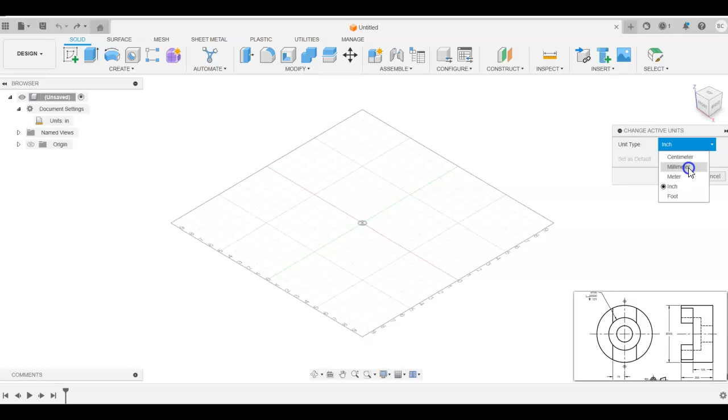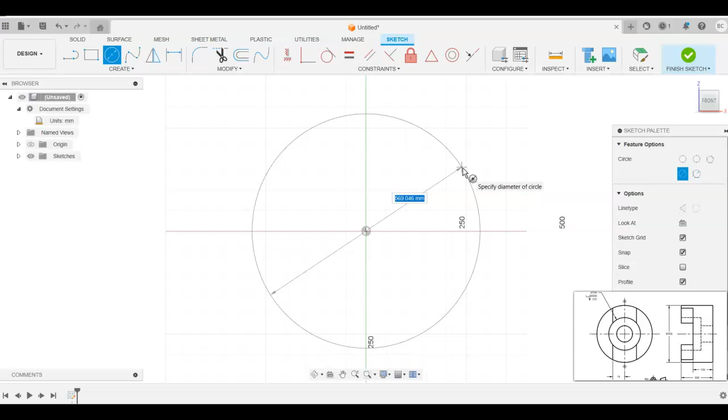So first thing, I'm going to come up here and double check to make sure that our units are in millimeters, since this drawing is in millimeters. And then I'm going to start by creating that sketch. We're going to create the sketch on the front view, and I'm going to basically draw the circle here. The outside diameter of this part is 500 millimeters. So we'll place that. That's all I need.

I'm going to click Finish Sketch. Go back to my home view. So we're going to extrude this back, and the depth here is 200 millimeters. So I'll extrude this back to the 200 millimeters. Hit enter. So I've got that form.

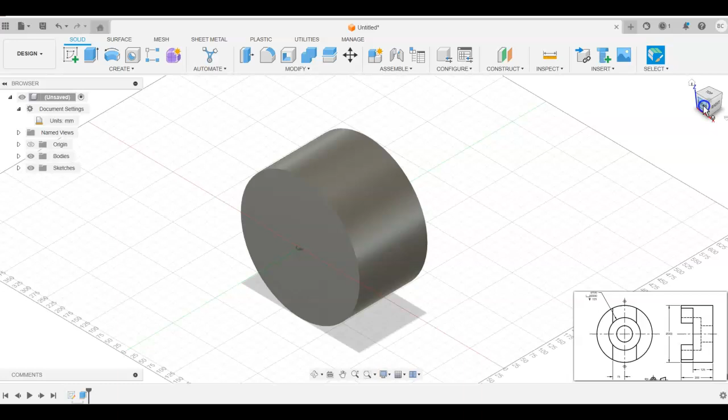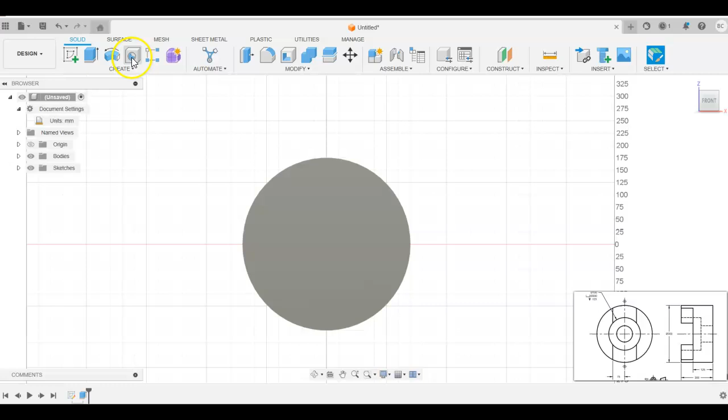Now, as I come back around here, we're going to come back in and we're now going to use the hole feature. Oftentimes we're given certain dimensions or we're given an existing print. We have to draw and create it from an existing print. So we're going to create this hole.

Now, it wants us to select the face first. So I'm going to select the face. Then it wants the placement at a point. Well, we're going to use the center point here. It makes sense that we draw this as a center. Now, with it being that point placement, I don't have to select any X, Y, or Z reference planes, but we could use those there as well.

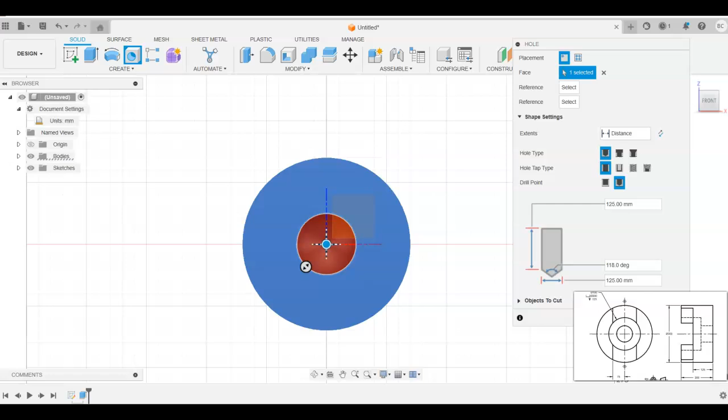In this case, notice up here, the call out right here says we want a 100 millimeter hole with a 200 millimeter counterbore. That is what this symbol means, 200 millimeter counterbore, and we're going to a depth of 125 millimeters. So let's change the hole type. We can have a simple hole, a counterbore, or a countersink. So we're going to go with the counterbore.

Now, we also know the extents. We can place a distance, but we already know we want to go all the way through. So I'm going to change the extents to all instead of distance. Now, at this point, it's just a matter of putting our dimensions in here. So I know that the dimension of the hole from the top part right here is 100 millimeters. So I'll type in 100.

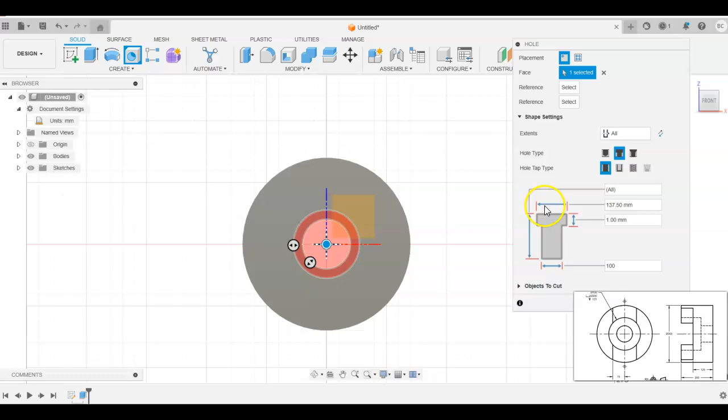And notice the dimension here for the counterbore. So that's going to be 200 millimeter on that counterbore, and then this is showing the depth of the counterbore right here, which should be 125 because we're going 125 deep. So that takes care of that. I can come down here now, move my window, and we can click OK.

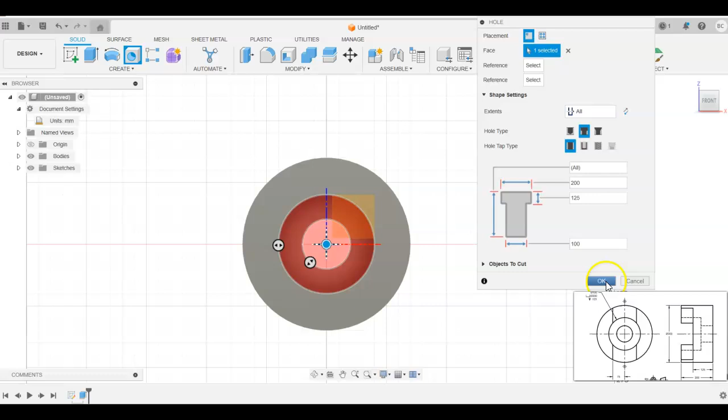So now we've got that hole. Let's click on here to see. We can rotate it around, figure out exactly where we're at. And now we just need to put the other dimensions and get this groove. So let's go back here. We're going to create a sketch.

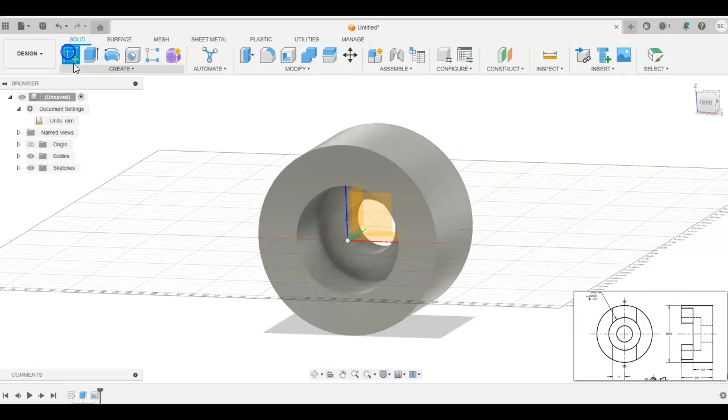At this point, I'm going to be sketching on this face of the part, and I'm just going to use a line. So now I can pick up the line. Notice it picks up some points here. This is tying that into the outside edge, and we want this to be at 90 degrees. So let's come back in here, and I can tie that in.

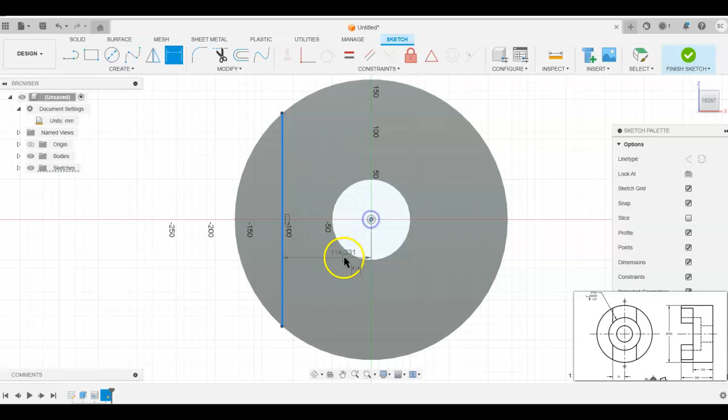Let's dimensionally constrain this. So I'm going to say this line needs to be dimensionally constrained. And here's where we take a look. I drew that. It's 114 point whatever millimeters. We need to change this to 75. So there's the 75. And at this point, I'm going to try to do the mirror.

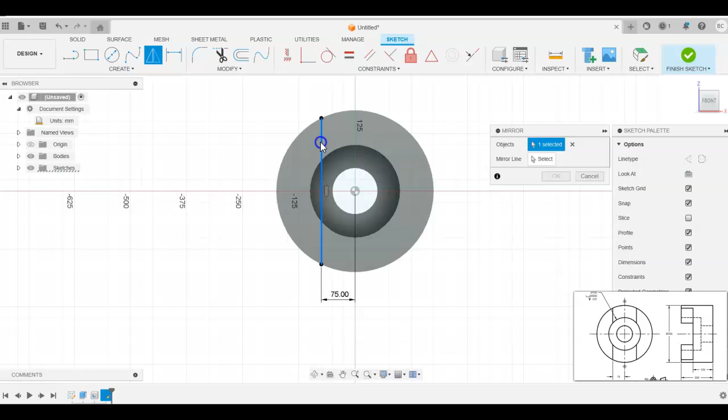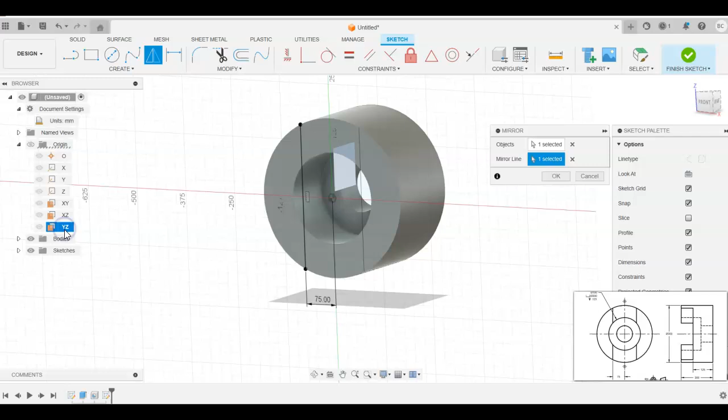So if I say I want to mirror, it wants to know the object, which is going to be that line, and it wants to know the mirror line. Now, here we kind of have to start to think about, all right, what are we mirroring this across? Come back over here into our origins. So notice we can use our planes here. So we are actually going to mirror that around the YZ plane. So I'm going to select that YZ plane, and click OK. So now I have those lines.

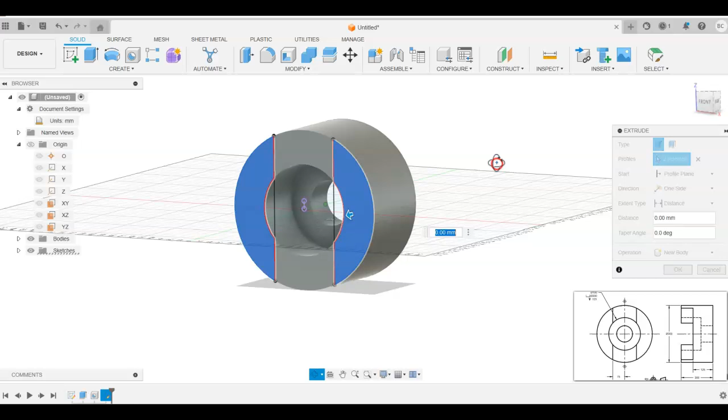Now let's finish this sketch out and see if that will allow us to use that geometry when we do our extrusion. So now if I go to extrude, I can extrude this and I can extrude that. And let's take a look here. So we need to go back. And this is going to be a cut here as well. And this is going to be minus 75 millimeters to cut that out. So there we go. A little 5.5 long video here to create this.

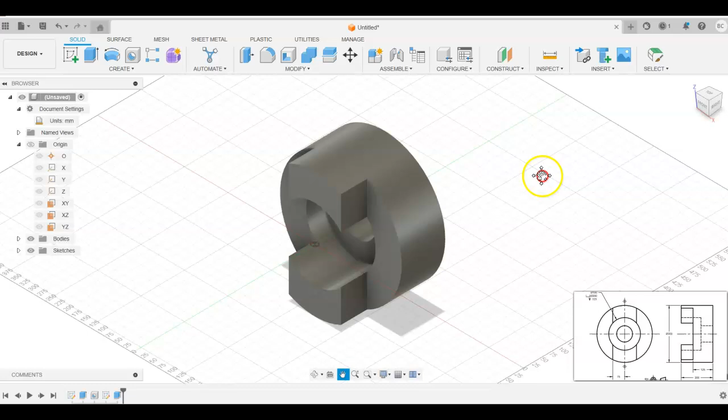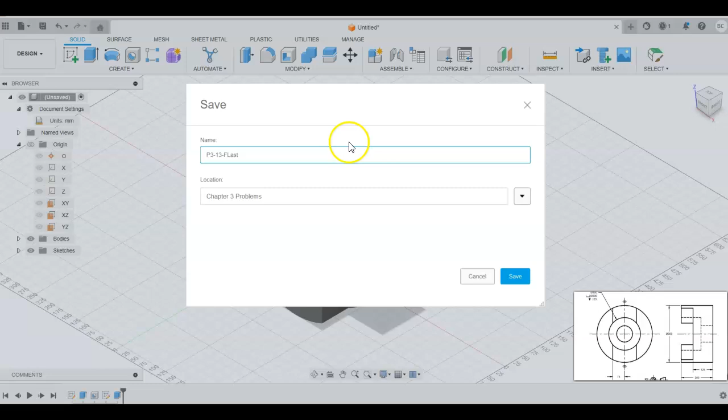Let's just double check. That's what it looks like in the front view. That's what it looks like in the side view. So everything is good to go. So I'm ready to create my actual drawing file. So let's come back here now to our drawing file. Notice we didn't save it, so let's save this. So this is going to be P3-13 hyphen your first initial followed by your full last name in chapter 3 problems.

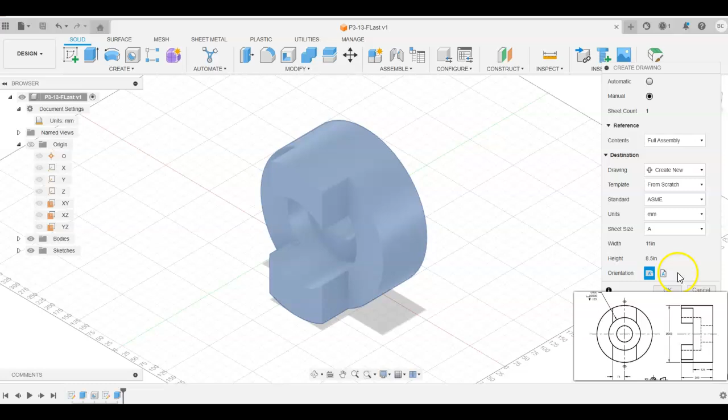That's saved. Now again, because we are in millimeters, this came up with the ISO standard, so the International Standards Organization. We want to make that the ASME standard, and we're going to go ahead and keep this as a size A sheet for right now, just so you can take a look at this and be able to print this out. And let's go ahead and click OK to get that in place. So notice, because of the size, it wants us to have this as a 1:6. So I'm going to change this to 1:4, just so we're a little bit bigger here.

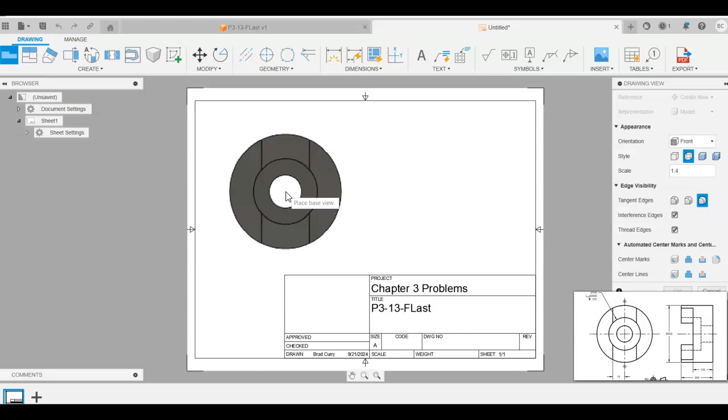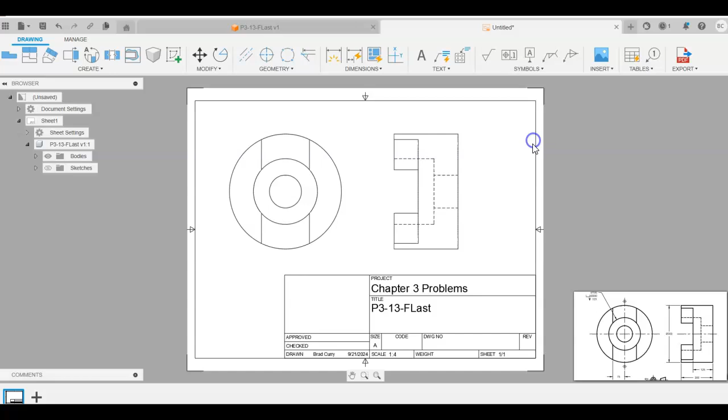And we'll place this view. Click OK. So notice how it comes up in terms of scale. It didn't really give us what we wanted in terms of our scale. So here is my side view as well. Right click and hit OK, and that gives us the drawings as we would see it there on our page.

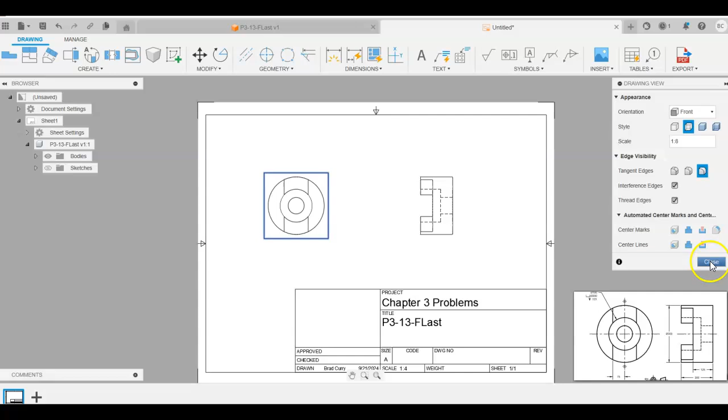Now let's change some stuff here. Let's go back in and edit this view. Remember, it is saying 1:4 here, so it adjusted this. Let's bring it back to 1:6. So notice it shrinks some things down. Let's go ahead and add center hole marks and see if that does anything here. Not really.

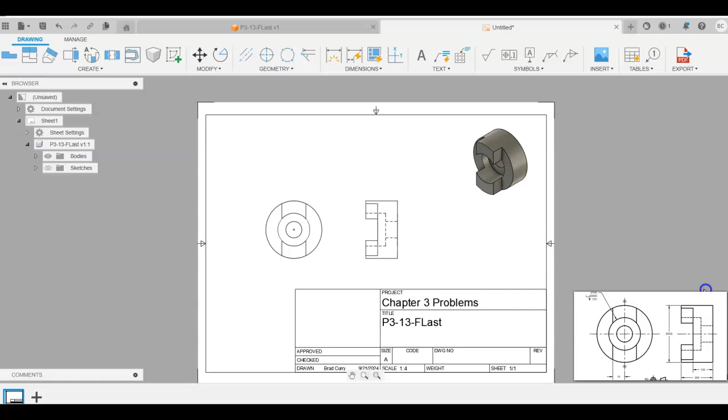All right, but we got one more projected view. So I'm going to project up, and let's go ahead and get this over here as well. And I'm going to change that to make sure that it is a shaded view here. And now I have this to where it looks the way I want. So we've got the drawing.

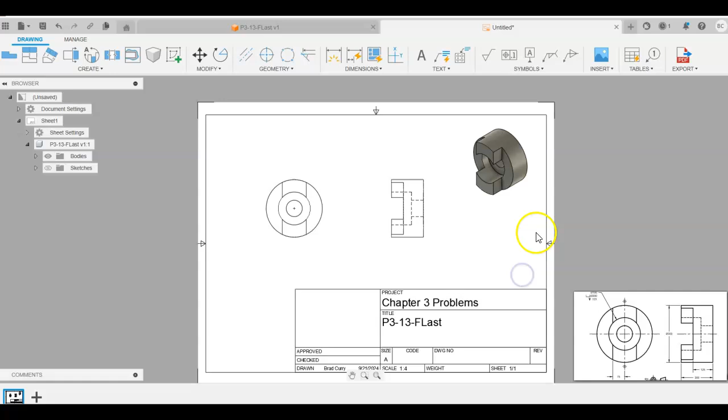So let's just go ahead and save this. Notice it automatically comes up, P3-13 hyphen your initial, your last name, and the drawing. I can click save. And this is where I'm at and how I'm finished with this drawing.